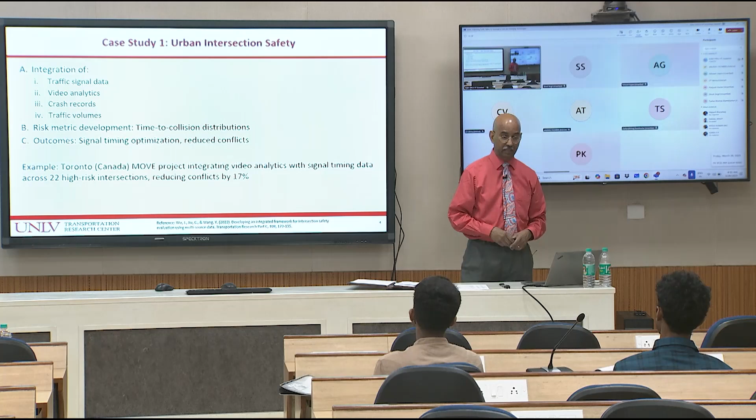So if you see that same thing over and over again at one particular location, there are some issues related either to the posted speed limit, maybe to the sight lines or sight distances, or maybe to the traffic signal timing, or to the signage leading up to that location. So what it resulted in was retiming the traffic signal to reduce conflicts, including maybe having protected left turns, protected right turn instead of permissive right turn. This is an example done in Toronto under the MOVE project at 22 signalized intersections, and they report that they reduced conflicts by 17%.

That's substantial. Ritvik, did you have a question? No.

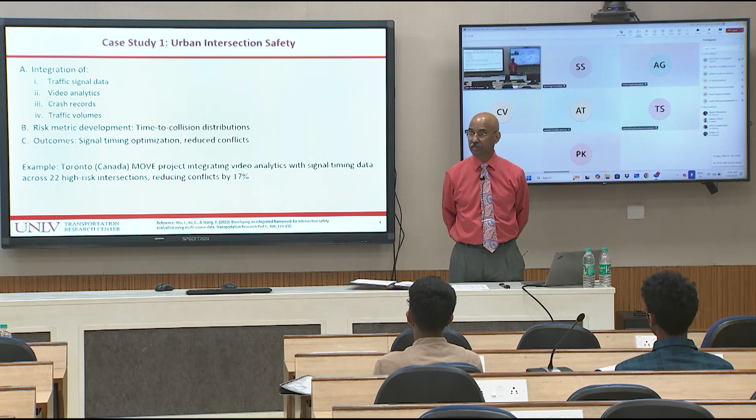So the next one was a corridor, not a specific location. In the United States, we have a lot more adverse weather for at least 50% of the geographic area of the United States, where in the winter we have ice and snow, and in some other areas we have very dense fog. Rain is there, but it's not as big a hazard for the most part.

So tying weather data from sensors, and I'll talk to you about where the sensors are, relating that to the pavement condition, basically the friction that you are able to generate, the braking forces that you will be able to generate based upon the pavement conditions, monitoring the speeds of vehicles, and looking at historical information on crashes. When we had these kinds of conditions, it ended up in such and such crashes. So now when we monitor in real time, can we provide feedback or roadside information, variable message signs, and so on.

So the theoretical approach was an empirical base, so if this, then that type. And so the outcomes were variable speed limits. So you can change the speed limit at any one location if you have an electronic board. It's not a painted sign. An electronic board you can control remotely. How do you get the weather data and pavement condition data? So there are lots of companies who do this.

One example, is there anybody who has not heard about the Michelin tire company? Michelin tire. Is there anybody who has not heard? Raise your hands. Okay. Left hand, the other left hand. Daniel, you have heard of Michelin. Good. Online, if you have not heard about Michelin, please raise your hand.

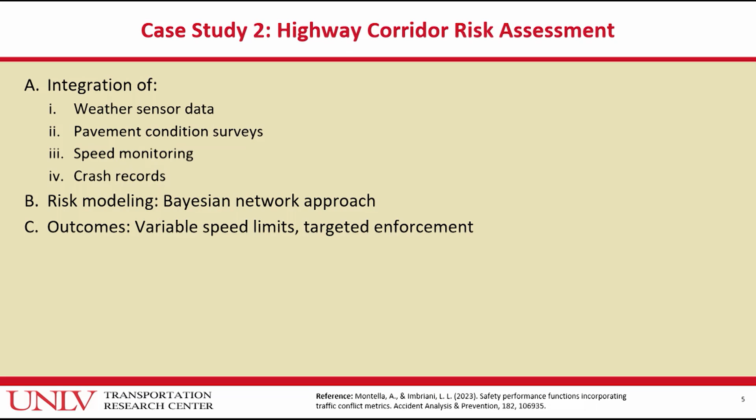Tushar, okay. So they are, I shouldn't say the largest, one of the large tire manufacturing companies, and many of their tires usually are on higher end motor vehicles. But nowadays they've made it into even medium cost vehicles. So they've been in this business for many years in terms of selling tires. But over the last decade or more, they've also started getting data from their tires. I work with Michelin on some research initiatives, trying to collaborate with them. We still don't have that. I don't have any personal shares or stock in Michelin, so I'm not trying to promote them.

So they get location, time, then speed, acceleration, things that we talked about. But because they have technologies that will measure the traction that the tire has with the pavement, they can figure out whether it's skidding or not as much friction being generated. So when, where, what, and they can tie it to environmental conditions there. So now you've got weather and road surface conditions tied together.

Other weather data: in the United States, the state PWD, Public Works Department, or the Department of Transportation, particularly where we have very harsh winter conditions, have sensors all over. When I say all over, probably every 3 miles, 5 miles, 10 miles, it depends. If it is hilly terrain, they may have them more closely spaced. And that measures not just temperature, wind speed, humidity, but pavement temperature. They have sensors embedded in the pavement, because the air temperature could be quite different from the pavement temperature. And combined with precipitation, rain or snow, you could have some very hazardous conditions.

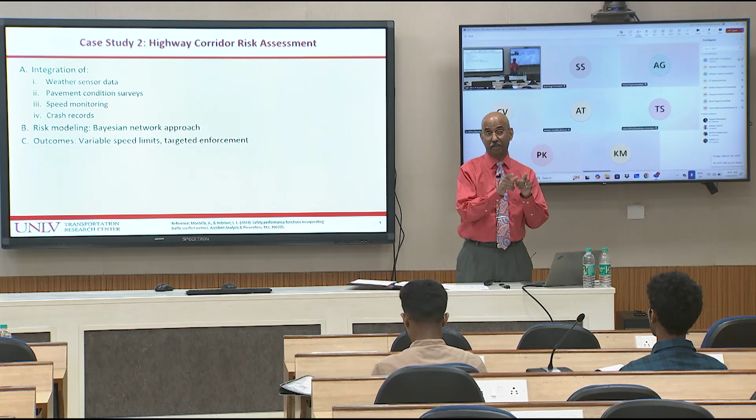They don't have to push it to everybody, only people who might be affected in that area. So you can be selective, because if you keep broadcasting messages that are irrelevant, the users will soon start saying, that's one more boring message. Whereas if it is something that pertains to them, oh, I need to pay attention. So that's another example. So now I'll go to a very traditional project. This is something that we are working on right now in Las Vegas.

And there we have in the US over the last 5+ years, bless you. We say bless you when somebody sneezes. Okay.

In my village we say something else, yeah.

So, complete streets. The concept of complete streets is to plan, design, construct and operate roadways that serve all road users. Over the last 60-70 years, from the late 1950s until about a decade ago, much of the emphasis has been on motorized vehicles, 4-wheel vehicles or more, buses, trucks. So the vulnerable road users such as pedestrians, bicyclists, those who may have mobility impairments...

Well, let me make sure I turn off my phone.

Thank you. Those with mobility impairments may not have as good an opportunity to move on these roads. What are examples? They don't have proper sidewalks, or footpaths as we call them here. Or you have a footpath that is maybe 1.5 meters wide, that would be very good to move a wheelchair. But because you have this electric pole or telephone pole right in the middle, all of a sudden it becomes impassable for the wheelchair person, right? That's a very simple example.

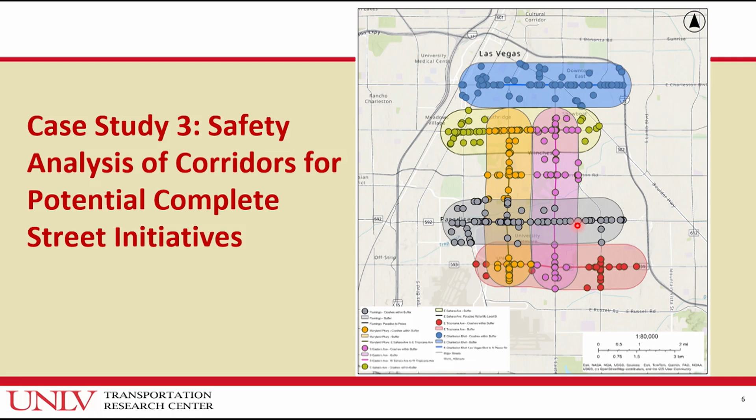So we looked at several things in these corridors, and what you see here are buffers. I'll show you more details in the next one. Next slide. We designed a half mile buffer and a 1 mile buffer. This is the maximum extent somebody is likely going to walk. If you have bus routes on two major arterials that are 1 mile apart, on average a person is only going to walk half a mile, right? So we are trying to figure out how many people are within walking distance of these corridors.

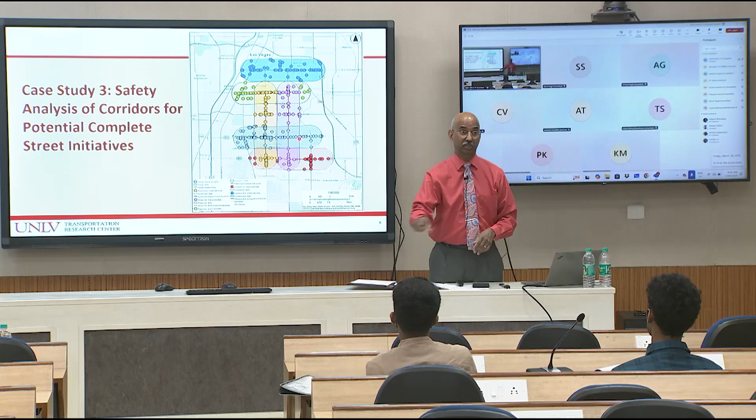Then we looked at the location of bus stops. I showed you an example 2 or 3 days ago at each intersection. Where are the bus stops located? Where is the farthest bus stop? And then for each bus stop, we know how many people are getting on the bus and how many people are getting off the bus. So that gives us a measure of activity exposure. People who are getting on and off the bus are walking. Some of them may have to cross the street, some may not, but all of them need to use the footpath, sidewalk. So that's trying to get an indication of the measure of demand. So that's one metric.

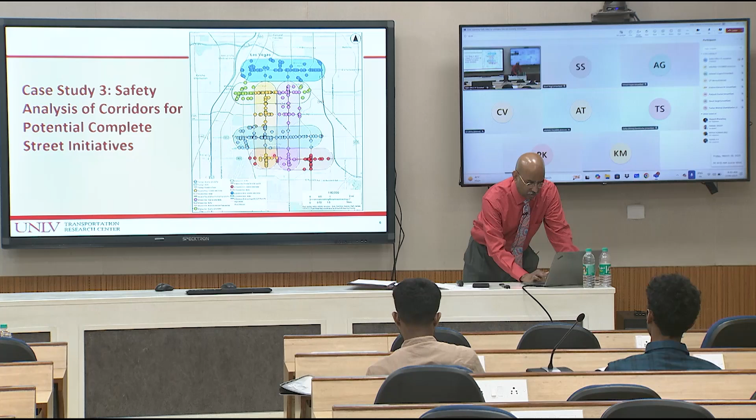The other metric we are looking at are crashes and outcomes of crashes. So what you see here are several corridors. So this is called Maryland Parkway. This is Sahara, and the next slide I'll show you more of Sahara, Charleston Boulevard. So you see we have some north-south corridors, east-west corridors, and the colors of the dots.

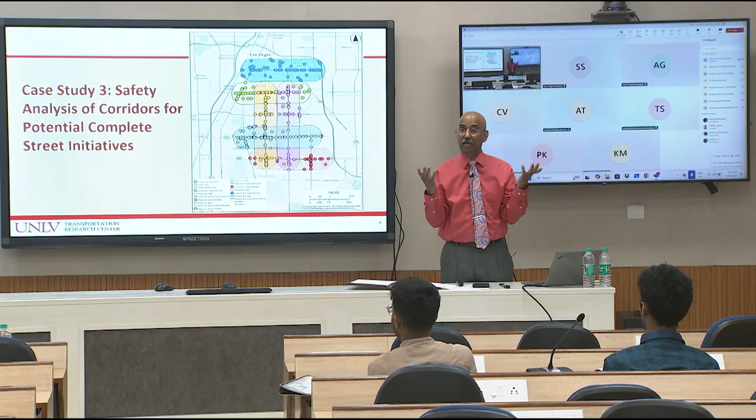For each corridor, the color of the dot represents a crash in that. And I'm not telling you on this slide whether that was a K, A, B, C, what the outcome was, but just to visualize how many crashes are there. Then here were two buffers that we looked at, the extent, so Sahara Avenue from here to here, and they said no, extend Sahara Avenue further.

So just by using tools that we have in GIS, we use ArcGIS Pro, you are able to buffer and then come up with how many crashes are within this buffer zone. Then we further dissect it into K, A, B, C, O. The next thing we are looking at is, okay, how many of these crashes involve pedestrians or bicyclists? If we were to improve the infrastructure for pedestrians and bicyclists, we likely will reduce those outcomes.

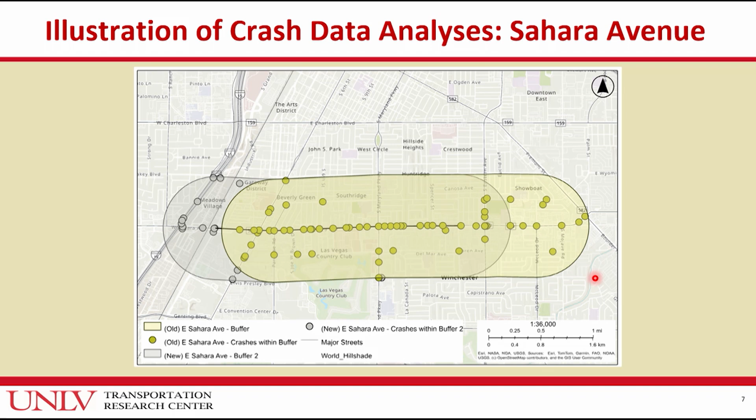So then we can go to the crash modification factors or crash reduction factors, what we talked about the day before yesterday, to say, okay, if we made this improvement, maybe we will reduce it by 8%. So if we had 10 crashes over the last 5 years, we will reduce it by 1 crash maybe. And how did we summarize the data? There are 2 ways I wanted to show you. On the x-axis are the corridors that we are evaluating, the ones that I showed you on the first map, several north-south, some east-west.

And for each corridor, just please follow me on the screen. I'm going to pick this one, Maryland Parkway. That is the major street just on one side of the university. And it's a very heavily used public transit route, one of the most busy outside of the resort corridor. It carries one of the highest passenger ridership. And one side is university, the other side you have restaurants, a lot of things that will attract foot traffic between the university and across that.

But as it is presently built and operated, it has 3 lanes of traffic in each direction. Very little for pedestrian accommodation. So that is being totally redone. So here, the bottom blue are pedestrian K-type crashes, fatalities. The next red is A-type, how many pedestrians were seriously injured. The next green is non-motorist, non-pedestrian. So this could be bicyclist, two-wheeler, wheelchair-bound person.

So the number of people killed, and the purple is those who suffered serious injuries. And the top 2 bars, the lighter blue, is for motor vehicle occupants who are killed, and the orange is motor vehicle occupants who sustained A-type injuries. So here is a count. So when I look at it across the board, just in 5 years, 2019 to 2023, you are looking at 90 plus crashes on this short segment of about 4.5 kilometers, less than 3 miles. If you look at total, over 90 crashes of K or A type.

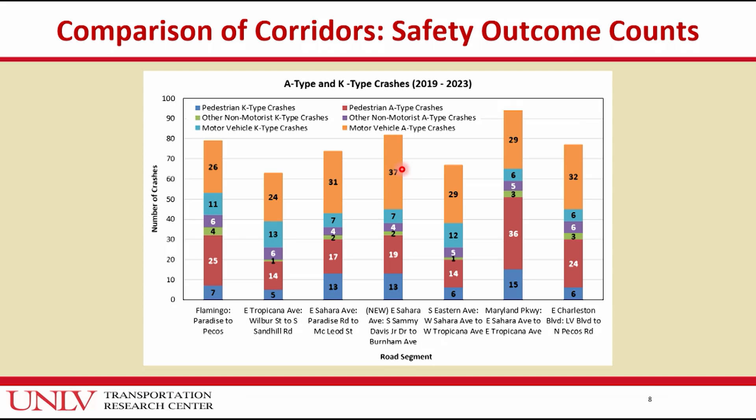And if I look at pedestrians, I have 15 pedestrians who were killed. So same way you can look at it. So now by looking at it very quickly, you can see which corridor had a higher number of pedestrian fatalities, total injuries, and our interest is mostly the K and A type to pedestrians and non-motorized users. So the top two parts of this bar are not particularly relevant when you are trying to identify the needs for the non-motorized users.

Another way to present this, as I have told you, is to look at it as proportion. So each bar is 100% here, but what percent of those are the K plus A for pedestrians, bicyclists. So just ignore the top blue and orange. You can see that it varies from about 60%, 65% here to the low of about 50%. Now the question is, they don't have money to build all of this, so they need to prioritize. The trade-off will be, do you take the count of crashes, the frequency, or do you take the percentage, or how do you weight the two together? So this is a very simple practical application of the data.

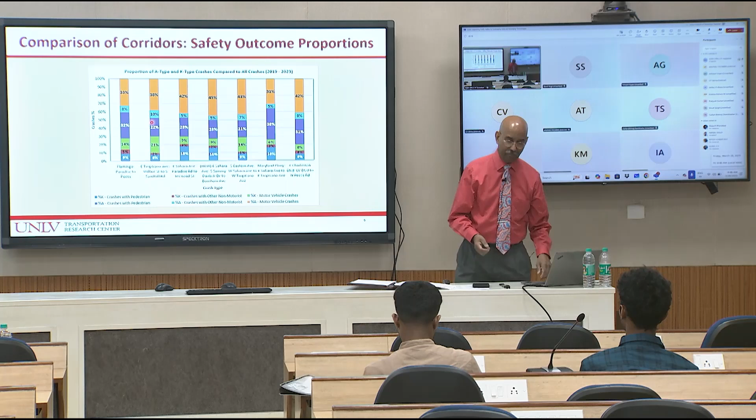Any questions, observations for people online? No, we understood that mobile data was also helpful in generating these figures. Which data are we talking about? They have the location, speed, acceleration, time, everything. So it's not that it's your mobile phone or his mobile phone or her mobile phone. They have hundreds of mobile phones that are going through that, and they are able to discern who is going straight, who is going left, who is going through. So in a way they are able to scan the devices.

Yeah, I don't know enough about the technology. It's their patented technology. I'm excited that I'm getting data that I can use. From what they tell me, it is primarily based upon mobile phone. But I'll show you some other examples where we have sensors all around the intersection and cameras.

So the previous set of videos I showed you, DERQ, they use the camera feeds, and then they use computer vision tools and techniques to figure out, is that a person walking, wheelchair, bicycle, so on and so forth. They can even tell whether it is an adult or a child, and they can extract the data for you for a price. They are in the business to make money. All right.

So here is another example of an ongoing project that I have with two collaborators. Brendan Morris is an electrical engineer and computer engineer. He specializes in computer vision and so on. So some of the work that I showed you earlier also is based on collaboration with Professor Morris. Paul Oh, he's a professor in mechanical engineering who does a lot of work with robotics and drones. And Beiyu Lin is a computer science faculty member. So you can see how the team has people from multiple disciplines who can bring their experience, their expertise.

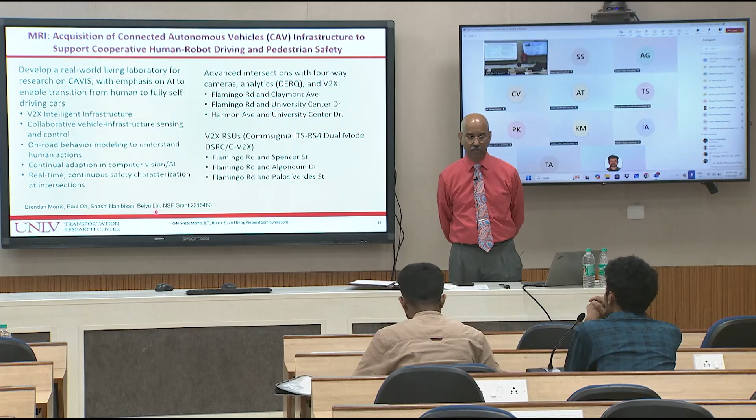So there are several intersections, and what we are doing, V2X, is vehicle to X. It could be infrastructure, it could be vehicles, and here are the names of the devices that we are using, and the next slide has a little more detail. It doesn't show up well here, but I'm glad it shows up here. So with funds from another grant, Professor Morris bought a car in 2019, and modified it, instrumented it with a whole bunch of sensors.

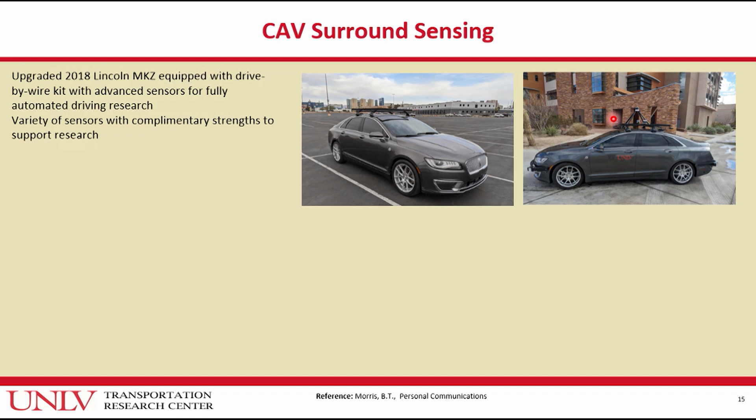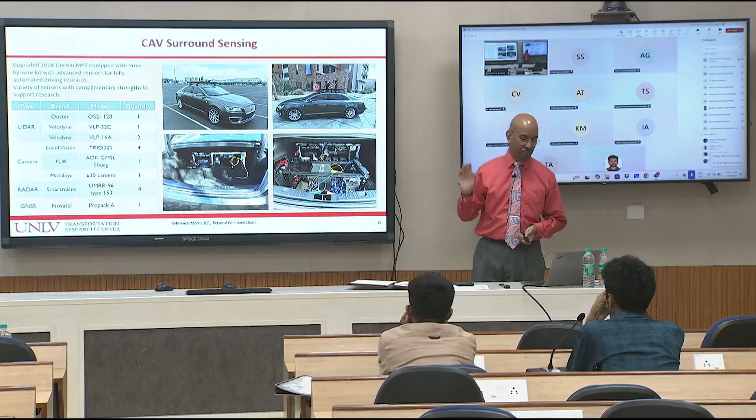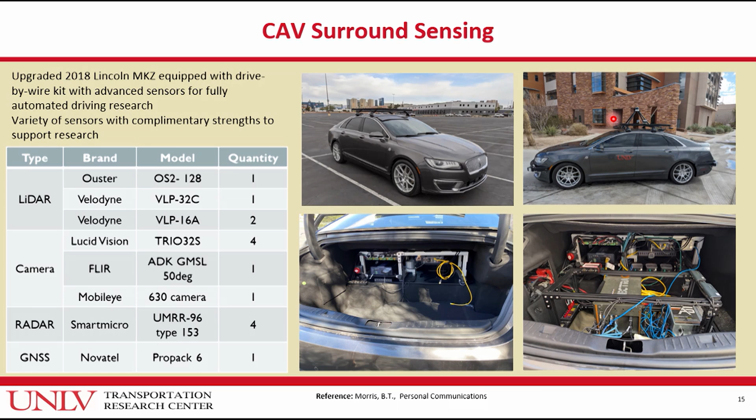So here's that vehicle. If you look carefully, there are sensors, radar, LiDAR type things mounted on top. And here's what the instrumentation is in the back of the car, where we otherwise might have put luggage. There's a whole bunch of instrumentation there. And here are some of the details of the instrumentation. So where do we use this? We get a whole bunch of driver and road user behavior data to try to figure out how we might identify problems and avoid problems. So that's the whole goal.

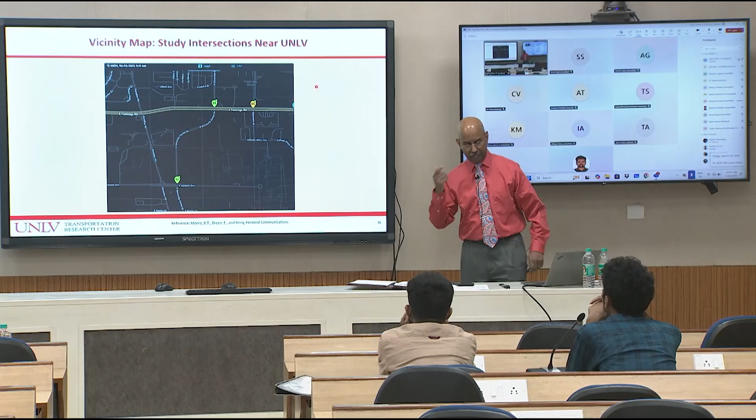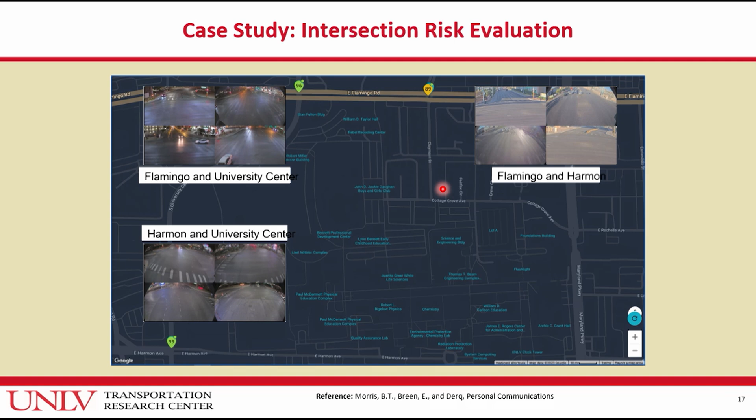So here's yet another project where we are getting data from Derq. As I mentioned before, this is where the university is located. So here are 3 signalized intersections in the vicinity of the university, for which I'm going to show you data in the next few slides. So here are the cameras mounted at each of these locations. We have visibility during daytime, visibility during nighttime, because we want to make sure that our solutions will work.

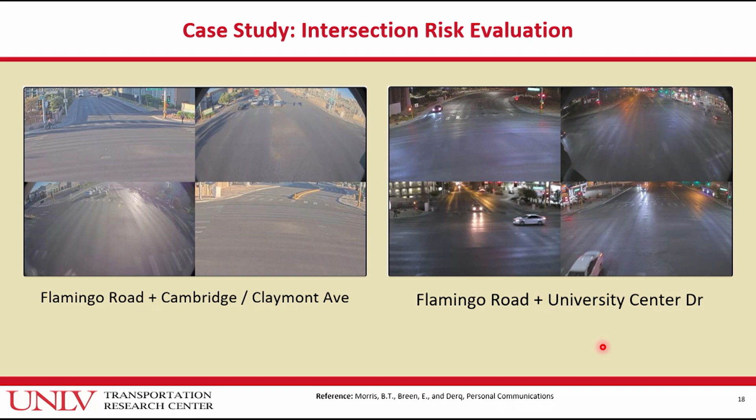So on the left side is a set of photographs, 4 approaches, 4 sets of cameras, daytime. On the right side is nighttime. But it's not just the capability of the cameras. In the Las Vegas area we are fortunate that we have fairly good street lighting, so that helps illuminate the roadway too. But the point I'm making is technology is there today. Even if it is nighttime, you can discern it. If there's lighting, it's even better. If there's not good lighting, you may have to go to more expensive types of cameras, night vision cameras.

So some of the next slides are very busy, lots of detail, the fonts are small. I will try to walk you through it. These are just screen capture shots. And I once again want to acknowledge Brendan Morris, Professor Morris from electrical engineering, and my colleague Erin Breen. Her background is not engineering at all. All her efforts are community and stakeholder engagement.

She looks at work that we do, the data analysis, and so on, whether she works with elected officials to come up with policies and regulations, or with the police, or with the neighborhood homeowners association or schools. That's her work. She lives and breathes to do that. Once again, the point I'm making is these are collaborative efforts that take different people. We can come up with the best solutions, but if we cannot get people to accept it, it's challenging.

Let me digress before I go. So many of the things that we see in transportation, I would say in other areas, but I'll focus on transportation and safety. Overcoming these challenges is steep. It's a steep challenge, right? Would anybody disagree with that? You may want to write this down. What do the letters STEEP stand for? We know steep as a word, very difficult to climb, a steep hill.

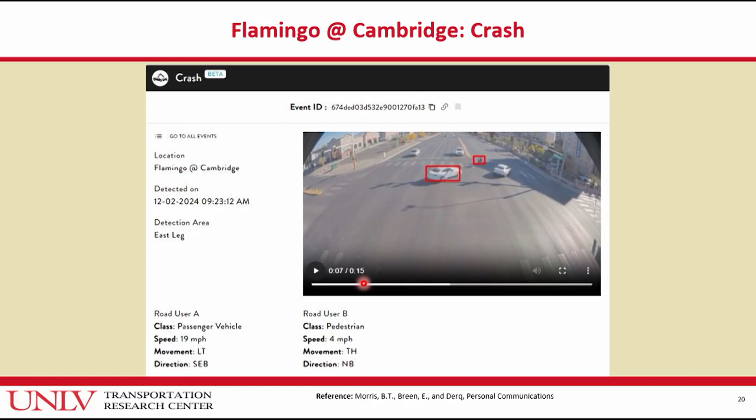And you can see they will give you a video feed of about 15 seconds, that's reasonable enough time. It may vary from a few seconds to maybe 30-35 seconds. On the previous set of videos that I shared with you online, most of them were between 15 seconds and 45 seconds or so.

So those are all video data, we can visualize it. But if we want to automate the analysis, we have to get it in some numerical format. So here are examples that translated each such event into some numerical values, and I'll walk you through this. This is a busy slide. The next slide I will zoom in.

Okay. But what I wanted to show you here, this is the company Derq, and they are a Dubai based company who have a lot of operations in North America and across the world. So you can determine what you want: location overview, safety insight, what type of events do you want, statistics about the events, and you can select what you want. And here traffic insight, so here is safety, traffic.

Do you want vehicle counts? Do you want vehicle classification? Car, truck, bus, so on, or even within passenger vehicles, different types of vehicles. Peak hour analysis, turning movement counts, vulnerable road user counts, speed distribution, and so on. So there are lots of options that they have pre-programmed, but if you or your organization want something different, if it is feasible, for a cost, most of these companies will retool the interface to allow you to get this.

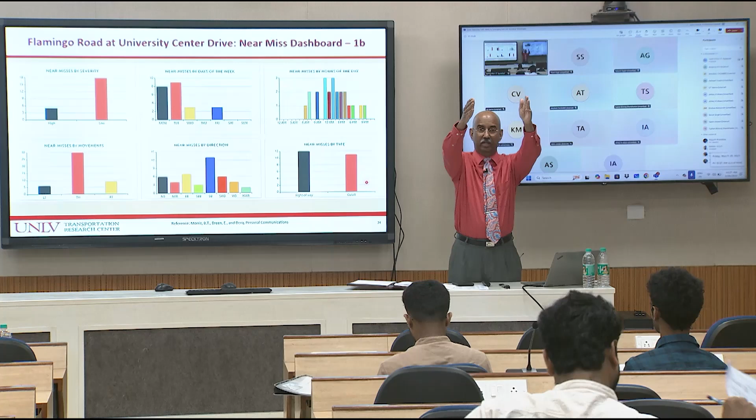Did everybody online hear the question? Is there anybody who did not hear the question? Thank you, microphone. If you did not hear the question, raise your hand. Otherwise, you're going to be held accountable for the question. Those in the classroom, Shashi and group sitting in the last rows, why did you choose to sit there? There's so much space here. I know you didn't want to disrupt the class. Thank you. Right. So first question is not clear.

First question is, where on planet Earth have you spent the most amount of time after you were 5 years of age, or after you would have started studying in first standard? Which city, town, village, district, you choose the geography, because under 5 years of age most of us don't remember a whole lot. After that we would likely remember.

Was that Chandrika Verma who asked that? Yes, sir, I have heard the question. Okay, thank you. I couldn't figure. Thank you, Ritvik, for helping me. So, Shashi and group, you need to relay the question to your newest teammate.

So, let's move to one more thing where I am interested also in pedestrian exposure. So far we were talking about all vehicular movements, and this slide is very similar to what we saw earlier, but I will walk you through the steps. Here is the safety score, we can choose: last 365 days, last 90 days, last 30 days. So this metric is for between February 4 and March 3rd of 2025. And on the y-axis is the count, and here are various indicators that we have.

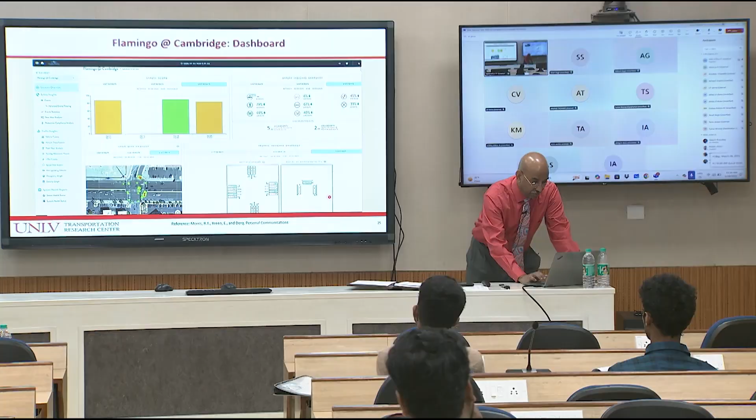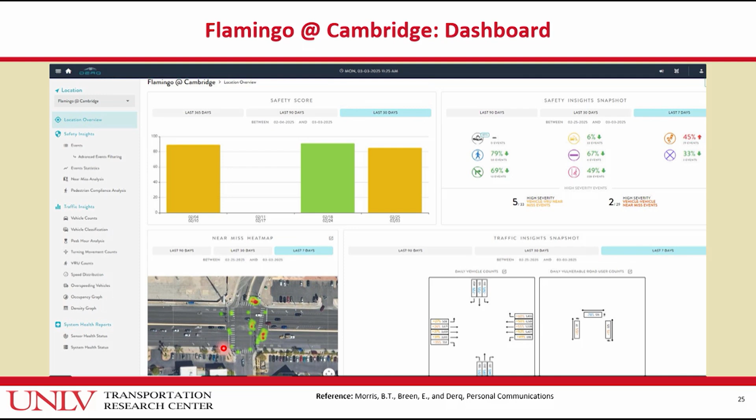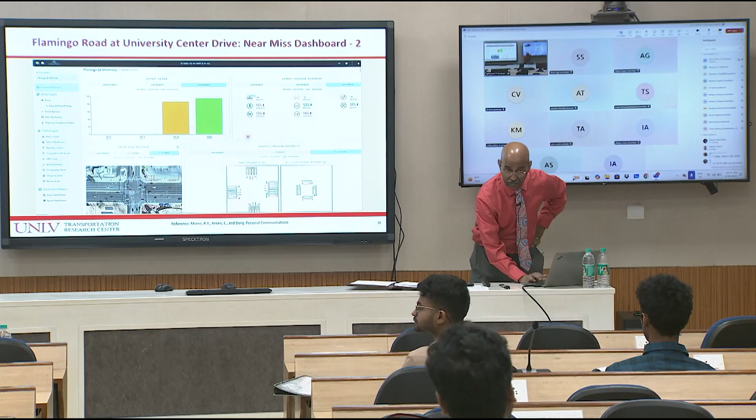And based on an analysis of all of this, we come up with a heat map, saying where do you have the highest concentration, highest intensity, highest challenge, highest need of the problems. This is a different location, but you get the sense. Similarly, you can see here we had increases. Last one I showed we had decreases. Here we have some increases. So this is Flamingo Road at University Center Drive. This was Flamingo Road at Cambridge, close to the university.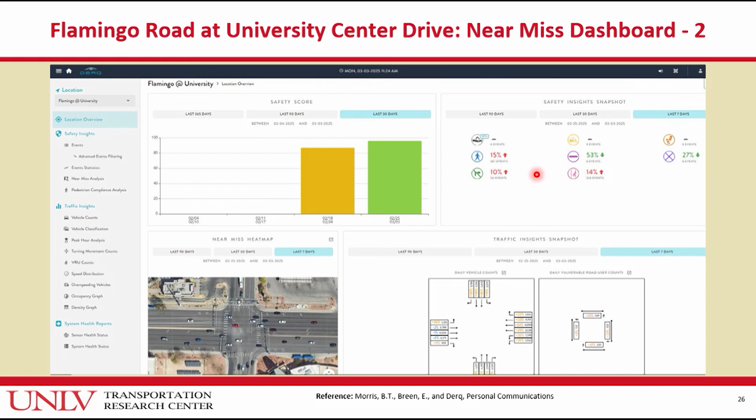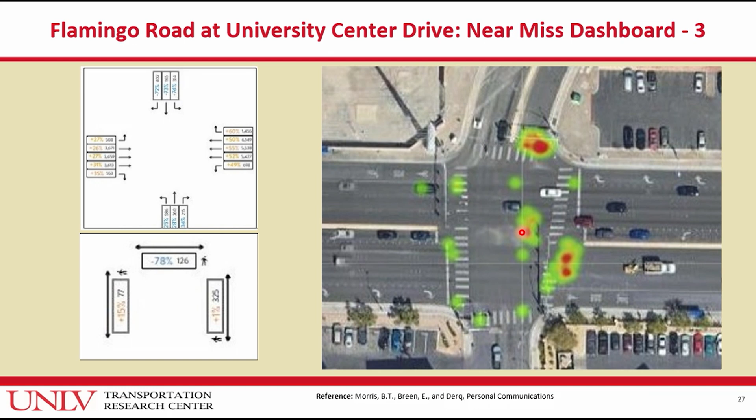And this is a zoom in of one of the previous ones, like how we extract intelligence from data. Now we have something actionable. We can show this to various people, not just the engineers or the planners. We can take this to the neighborhood homeowners association meeting, the parent teachers meeting. Here are actual problems. Here's what we are trying to do to help improve the situation. We need your cooperation, we need your buy-in, we need your participation.

So as I mentioned, it's not just doing the analysis, but communicating what you did, what it means, and how it would affect them. And pictures, graphical communication tools are absolutely important in this.

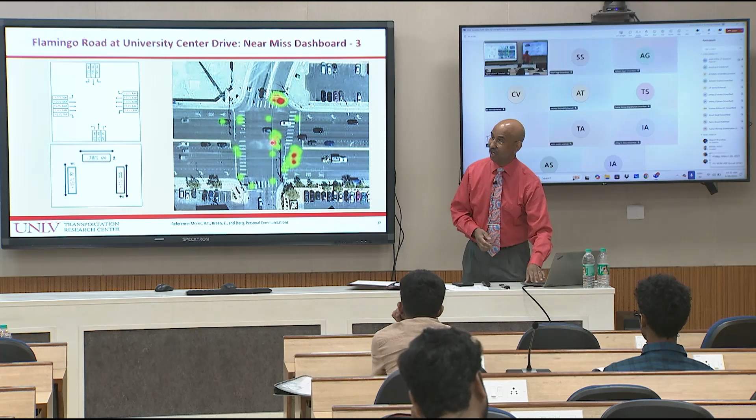So I said 10:30 and I am right there, and I can start the next exercise if Chai is not going to be here till 10:45. Chai is there? Oh, thank you so much.

So once again, please buckle up, everyone, every position in the vehicle, every time. Before the other person starts the engine or you start the engine, and until you turn off the engine. I see some people doing this. Yes, do it, do it, do it. Okay. Lead by example. I'm not afraid to shame other people in the vehicle if they disobey such simple things that can make a life of a difference. All it takes is a fraction of a second of no fault of our own. It may be somebody else who violated traffic laws, came and hit our vehicle.

And I have a very personal reason why. I lost my father-in-law when he was 45 years of age. He was a professor of chemistry. He was a dean of a university here in Cochin. You know how? He was in a motor vehicle that had 8 other occupants going to the Puri Jagannath temple. Everything. The driver kind of nodded off, fatigue, just dozed off for a moment. The vehicle rolled over. It was on an embankment.